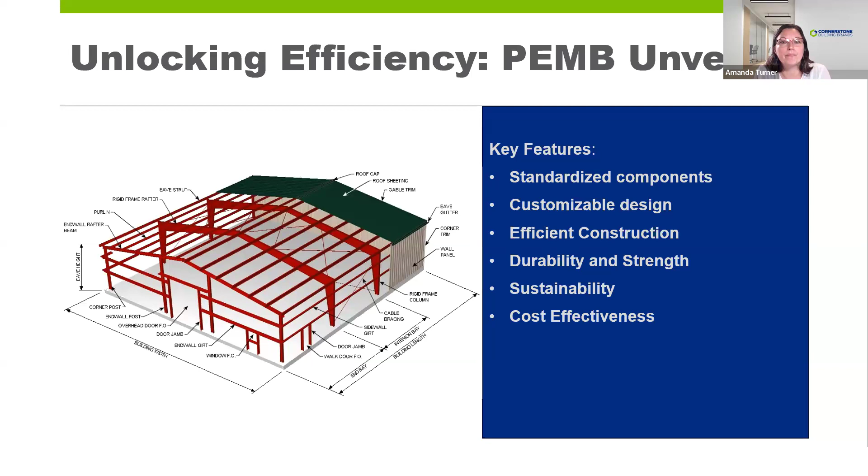As the global focus on sustainable building requirements intensifies, metal buildings stand out as leaders. Pre-engineered metal buildings can be designed to incorporate sustainability features such as energy efficient insulation, daylighting systems, the integration of renewable energy and recycled water sources, and the use of recycled materials, contributing to environmental sustainability.

You may have heard of green steel. Well, there are indeed green features of pre-engineered metal buildings, due mainly to the fact that steel is the major component in pre-engineered metal buildings. Steel has a higher strength to weight ratio than any other building material. That means fewer resources and materials are needed to build a steel structure to handle the same amount of load or stress as other building materials, such as wood.

Steel is also 100% recyclable at the end of its life, and 630 million metric tons of steel are recycled every year. That recycled steel, on average, contains 79% recycled content when produced in the electric arc furnace. Additionally, steel buildings can be fabricated to exact specification, minimizing waste, and component parts can easily be deconstructed and repurposed or recycled.

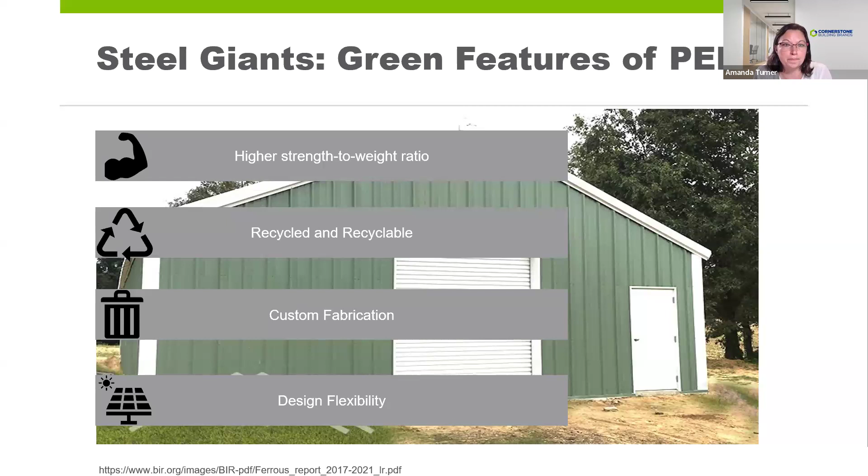Pre-engineered metal buildings are designed to be energy efficient. They can incorporate advanced insulation systems to enhance energy efficiency, and proper insulation helps in maintaining desired interior temperatures, reducing the need for excessive heating or cooling. Many pre-engineered metal buildings use cool roof technologies with reflective surfaces to minimize heat absorption. This contributes to lower indoor temperatures, reducing the demand for air conditioning and improving overall energy efficiency.

Well-designed pre-engineered metal buildings often incorporate features like large windows and skylights for natural daylighting. Natural ventilation strategies also help reduce the reliance on artificial lighting and mechanical ventilation systems. Some pre-engineered metal buildings incorporate renewable energy sources, such as solar panels, to generate on-site electricity. This can offset energy consumption from the grid and contribute to a more sustainable operational phase.

And lastly, thermal mass features in pre-engineered metal buildings help regulate indoor temperatures by storing and releasing heat. This can contribute to a more stable and energy efficient indoor environment.

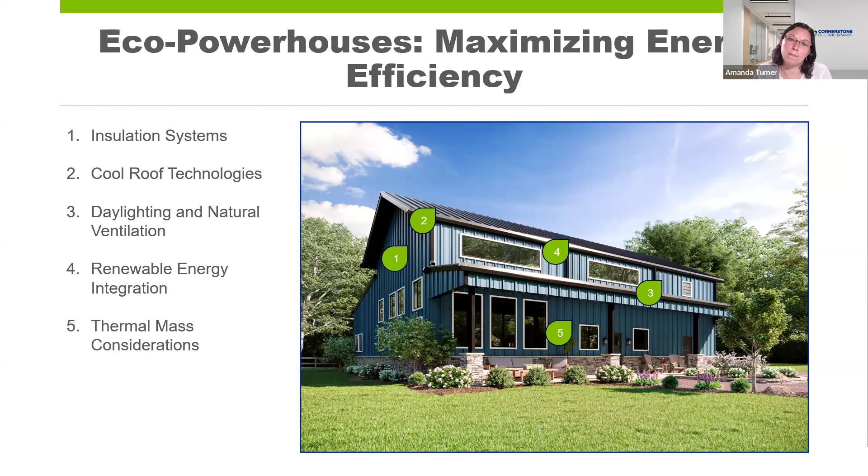So how does steel compare to traditional building materials? In terms of perceived sustainability, there are several sections where steel is considered more sustainable than concrete or wood. However, when it comes to raw material carbon content, steel production is very energy intensive compared to wood. And although there are some sustainable alternatives, these alternatives may be costly.

All steel products and wood siding products incorporate recycled content, but concrete and wood framing do not due to material and performance requirement constraints. Additionally, LEED certification is driving buildings to optimize many material aspects. The type of material can affect the overall efficiency of a building.

Steel is easier to maintain over time and tends to have a significantly longer durability than wood in particular. And when it comes to the end of the steel building's life, recycling at commercial sites is more common as large companies seek LEED certification, with steel recycling more mainstream than wood. Concrete is typically not recycled into new wall panels, but can be recycled for other uses.

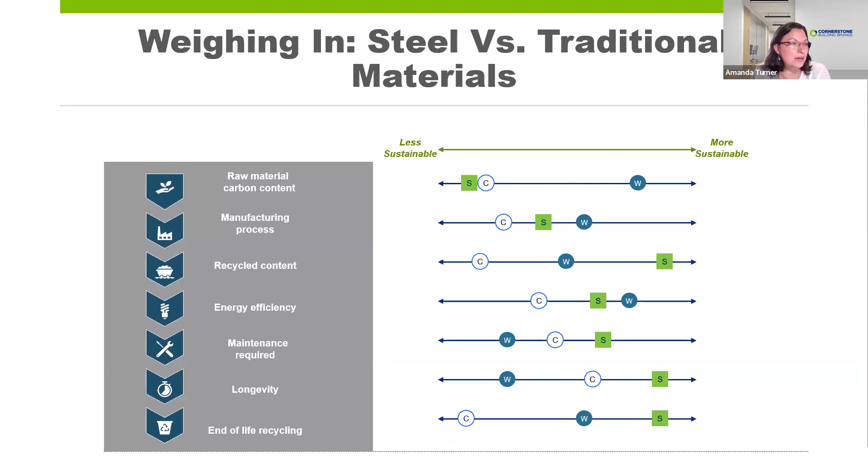So now that we've discussed the attributes of pre-engineered metal buildings, we are going to move into the sustainability best practices with pre-engineered metal buildings. The first step is sustainable sourcing. Procuring environmentally friendly materials for pre-engineered metal buildings is a key step on the path to desired sustainability.

When you are sourcing your steel, source steel with a high recycled content or from responsible mining practices. Verify the sustainability claims of material suppliers. Certification standards, such as those for recycled content or responsible sourcing, may vary. Try to locate suppliers with environmentally friendly transportation practices and sourcing materials locally. And finally, balance sustainability goals with budget constraints.

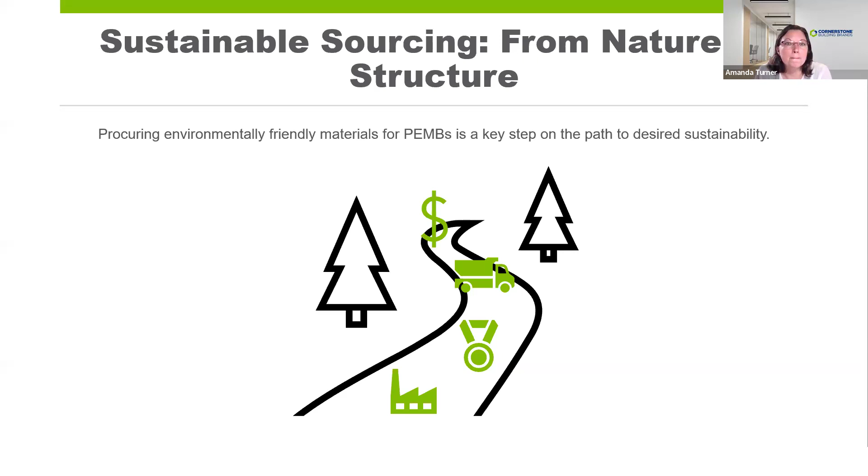Once you get your steel, you're going to want to focus on using recycled steel. Using recycled steel in construction significantly reduces our carbon footprint and conserves valuable resources. Recycling steel cuts CO2 emissions by up to 86% compared to primary steel production.

Every ton of recycled steel saves approximately 2,500 pounds of iron ore, 1,400 pounds of coal, and 120 pounds of limestone. Recycled steel also saves between 60 and 74% of the energy used to produce virgin steel. Recycling steel reduces the burden on landfills and mitigates environmental pollution and degradation. Through recycling, the steel industry saves enough energy to supply the annual electricity needs of more than 18 million homes.

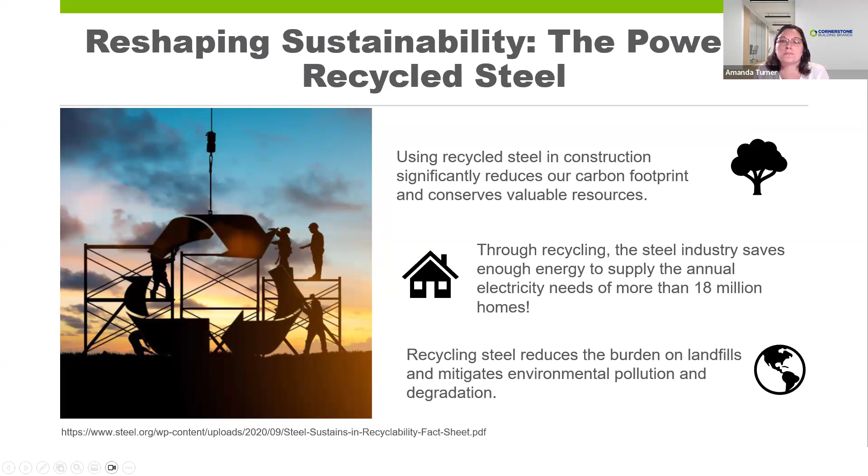And how do they do that? It starts with the production of steel. Steel, which is a fundamental material in pre-engineered metal buildings, is energy intensive to produce. Extracting iron ore, refining it into iron, and then producing steel involves multiple energy intensive steps.

It's essential to acknowledge the energy intensive nature of steel production and fabrication processes in pre-engineered metal building manufacturing. Sustainable practices can help mitigate these challenges, such as using recycled steel and optimizing manufacturing efficiency. Additionally, incorporating energy efficient technologies in manufacturing facilities can contribute to reducing the overall environmental footprint of pre-engineered metal buildings.

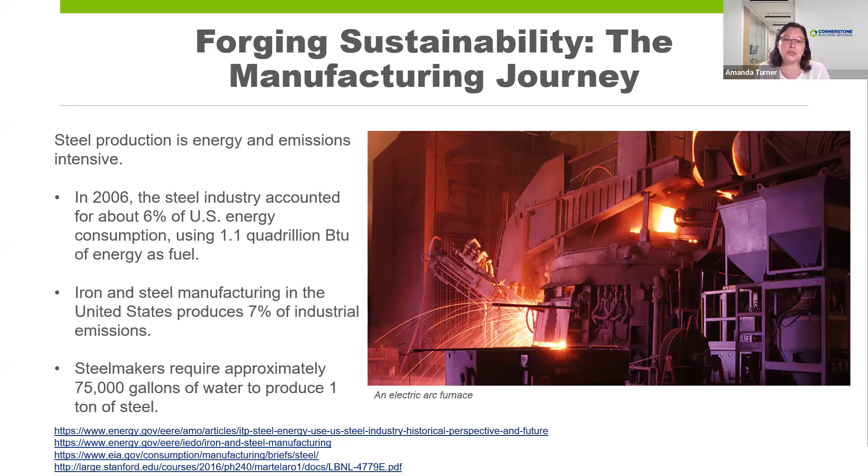We have become much more energy efficient in the last few decades than we were previously. Energy management improvements in steel production have resulted in reductions of nearly 60% energy consumption since 1960. Producing a ton of steel today in North America requires less than half the energy that was needed to produce a ton of steel 40 years ago, resulting in a 50% reduction in greenhouse gas emissions. That means that a single ton of steel produced today compared to 1980 would save the greenhouse gas emissions equivalent to driving a car for 2,000 miles.

This decrease in energy consumption can mostly be attributed to an increase in the share of electric arc furnace production and more recycled scrap use in basic oxygen furnaces. Energy efficiency improvements also played a role, which was primarily due to a move to almost 100% continuous casting in this time period, as well as energy efficiency improvements as new electric arc furnaces were built.

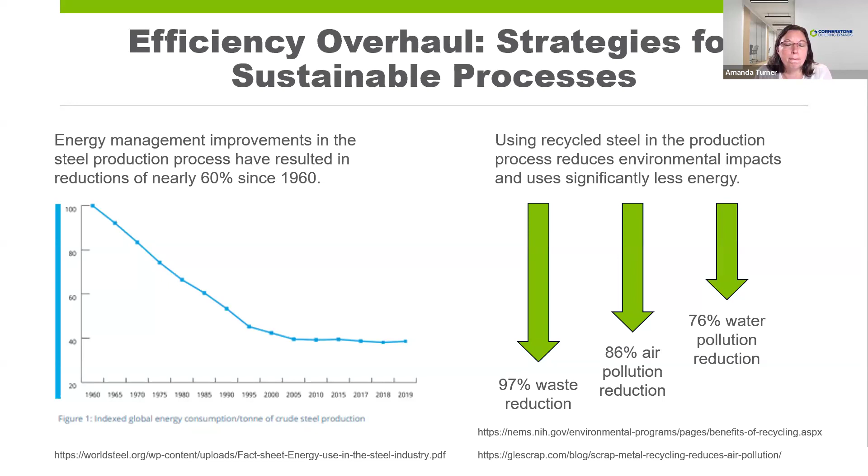Technology development is also underway to provide an infrastructure capable of supplying renewable electricity to help enable the industry to decarbonize its operation. Technologies for efficiency improvements are essential tools to compete in an ever-expanding global market. While steel tends to have a significantly longer durability than other construction materials, such as wood and concrete, it will eventually reach the end of its useful life.

Steel is one of the most recycled materials in the world, and recycling metal components from pre-engineered metal buildings requires stakeholder collaboration during all phases of construction. Specifically, the deconstruction process to dismantle pre-engineered metal buildings can be intricate, especially if the original design did not prioritize ease of disassembly. You may also have issues with transportation of dismantled metal components to recycling facilities, and you may incur environmental costs. However,

Can you hear me? I can hear you. Okay. All right. Thank you. Sorry about that.

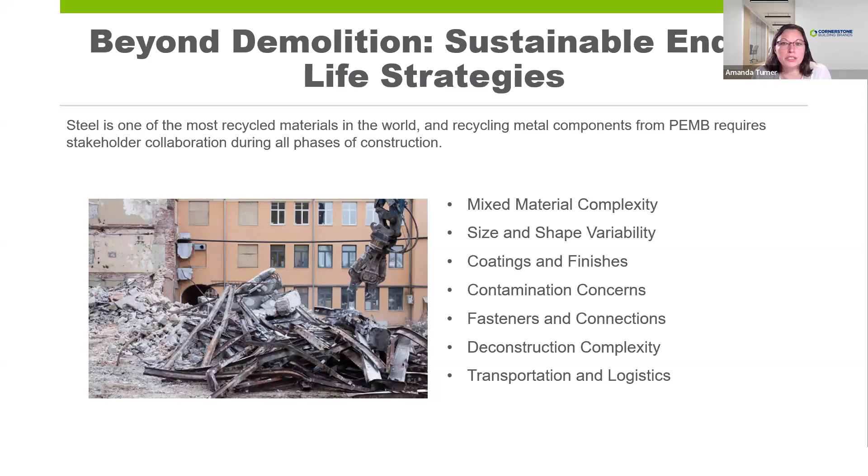So now we're going to talk about how to advocate and educate others on sustainability in the pre-engineered metal building space. Sustainability advocacy is integral to the PEMB industry as it aligns with environmental responsibility, resource efficiency, cost effectiveness, regulatory compliance, and the growing demand for eco-friendly construction solutions. It positions the industry for long-term success while addressing global challenges related to climate change and resource depletion. This can be achieved by several different methods.

Know the environmental impacts. Pre-engineered metal buildings, like any construction projects, have environmental implications. By advocating for sustainability, we can help mitigate the industry's ecological footprint by promoting eco-friendly materials, energy-efficient designs, and responsible waste management. Conserve your resources. Sustainable practices encourage the efficient use of resources. Advocacy can drive initiatives to reduce material waste, optimize energy consumption, and promote the use of recycled or recyclable materials in pre-engineered metal buildings.

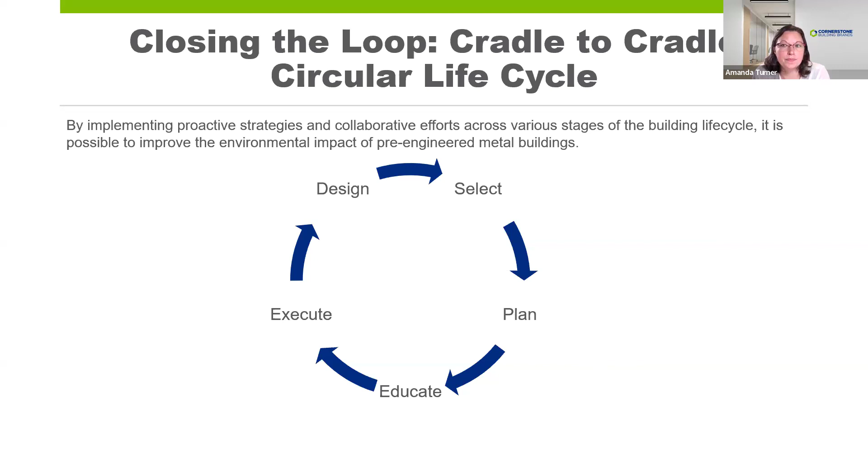Excellent. Do we want to stop there for questions?

The LEED Platinum Hangar 25 also features low water plumbing fixtures, native plant landscaping, and low maintenance diamond polished concrete flooring. It employs natural daylighting and a large propeller ventilation system. Its innovative water mist fire suppression system is the first of its kind in the US and uses significantly less water than an ordinary system, while also avoiding hazardous chemical transmission. 48% of the materials used in construction were obtained locally, and 77% of construction waste was recycled.